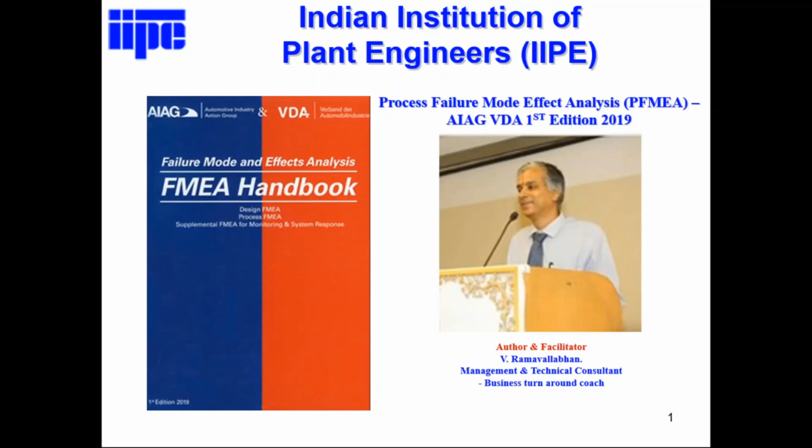This program has been organized by Indian Institution of Plant Engineers, IIPE. This body was started in 1971 at Chennai with just 80 members. The main objective of this body is to improve the effectiveness, utilization and productivity with the quality of plant and machinery in manufacture, distribution, service and other industries. IIPE has grown to a healthy plant with around 17,000 members. Today it has around 26 chapters all over India.

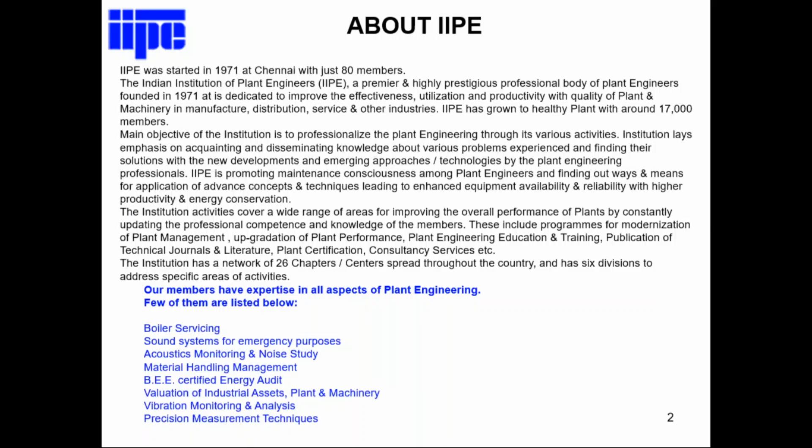So today the score stands at 19,846 members has been trained so far. Consulting projects, 119 has been completed and 6 is in process. The projects are like business turnaround projects, setting up the business objectives, laying out the roadmap for them to achieve, and various standards implementation, OEM requirements.

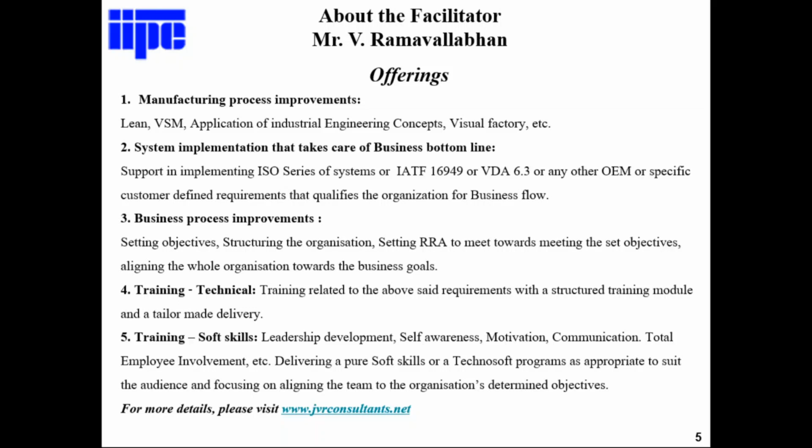On training, anything related to enhancing the technical competence of the people. And with regard to soft skills, empowering the people, making the people employable. Relevant appropriate training will be identified and determined, and those things will be offered. So this would be the offering.

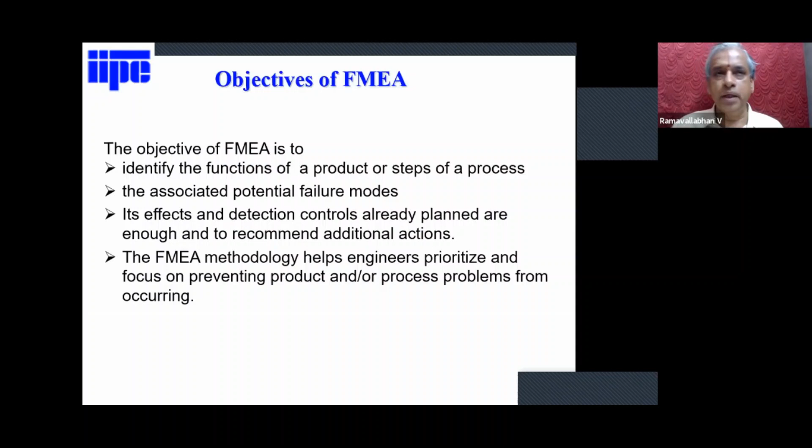Function is nothing but the solution for which you are working. Function is what? There are two things. People may get confused between the functional requirements and the requirements of the product. For example, if you have a pen, the pen's functional requirement is to write. Other requirements are the pen should be of diameter 10 mm, the length should be 15 centimeters or so - these are all requirements for manufacturing the pen. But basically what the pen's function is, is to write.

So you need to understand for what function this product is being made. So the objective of the FMEA is to identify the functions of the products or steps of your process, the associated potential failure, etc. Then if failure comes, what will be the detection mechanism, and how to prioritize which one to take first.

Then there is a foundation FMEA - people will have some family of products, and you can have some foundation FMEA for that. Overall, some FMEA you can do based on the model with minor differences. You can fine tune your FMEA part number wise. That is the thing told here.

Then, what are all the cases you will be using this FMEA? Case one is new design, new technology, or new process. Whenever you are going to do some new design, new technology, new process, you have to apply FMEA.

New application of the existing design - in the existing design or process, if you want to apply a new application, that time you have to do FMEA. And engineering changes - already there is a design, there is a process, on which you want to do some engineering changes. Whenever you do some changes, it may influence some other defect. Sometimes you go for fever, the doctor will give you ulcer.

Whenever you take some pill for fever, the doctor may give an antibiotic. Antibiotic is acidic based, but if you don't take antacid along with that, you will get ulcer. So you are doing some change in your product.

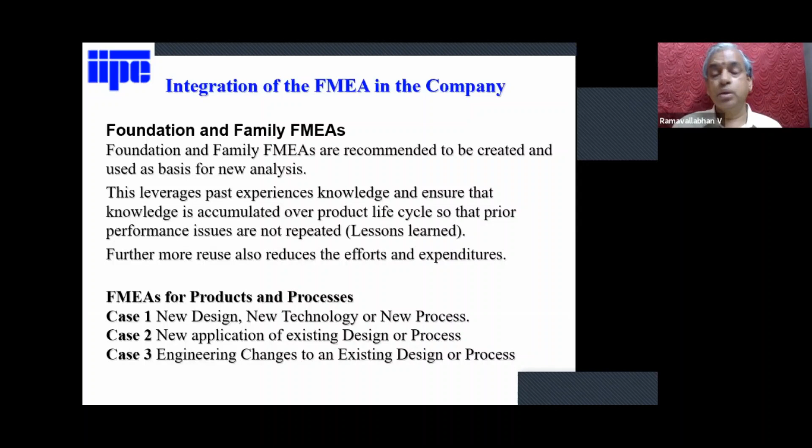Whenever there is a change, there is a possibility of influencing some other defect also. So that also you have to consider. Whenever that happens, you have to do FMEA, and when doing FMEA, you start with project planning.

Project planning involves the 5 T's. The 5 T's are intent, timing, team, task, and tools. Intent is the first T. Intent means objective, Lakshya, Kurikol - intent is the objective.

Timing, you know that. Team - who are all the team members that will be better for carrying out this particular project? For each team member, what are all the tasks to be given? There may be a tooling person who needs to be given some task related to tool development.

And there may be a quality person. He needs to read the drawing and tell them what is really important here. If there are any concern areas, he needs to come out with that. Likewise, each and every process member should participate - production, quality, maintenance. You have to bring the team member, and each team member should have the task.

Then tools - what kind of analysis tool you will be using. There is something called why-why analysis, 8D analysis, and fault tree analysis - what kind of tools you will be using for analyzing a defect or a failure.

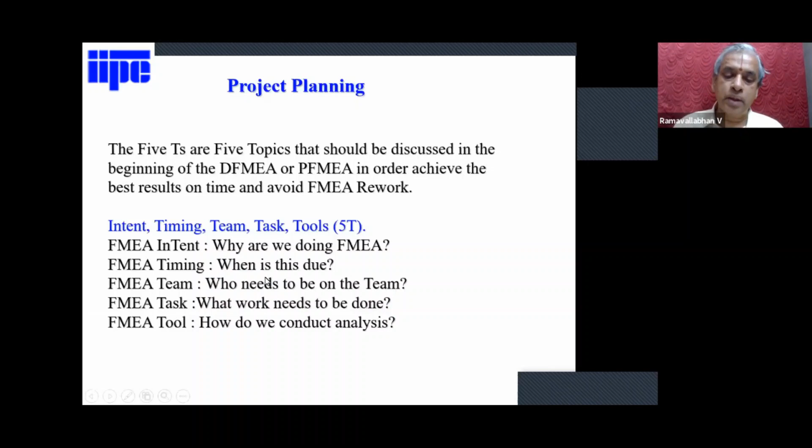So this is where intent is why we are doing this, timing is when it is due, team is who needs to be involved, task is what work needs to be done by them, and tools is how do we conduct the analysis. This is what it is.

The 7-step approach goes like this. In one shot, I will give you a clean explanation of this. You will get the background, and based on the background, if I proceed further, you may be able to understand better.

First step is whenever you start a project, you have to plan what for this project is being done. As I told you, you are going to design a product. Now we are going to focus on process only, but I will tell you how this process is getting birth from the design. Once you understand this, automatically the process of FMEA will be very, very simple.

First of all, what is this product? What are we going to expect out of this product? For that, you need to plan with the product name, which customer you are going to work for, what the customer is expecting out of it, the part number, etc. That has to be planned here.

Then comes the structure analysis. Structure means what? There is a building structure. In the building, you have kitchen, hall, bedroom, puja room, and so on. This is the structure of one building.

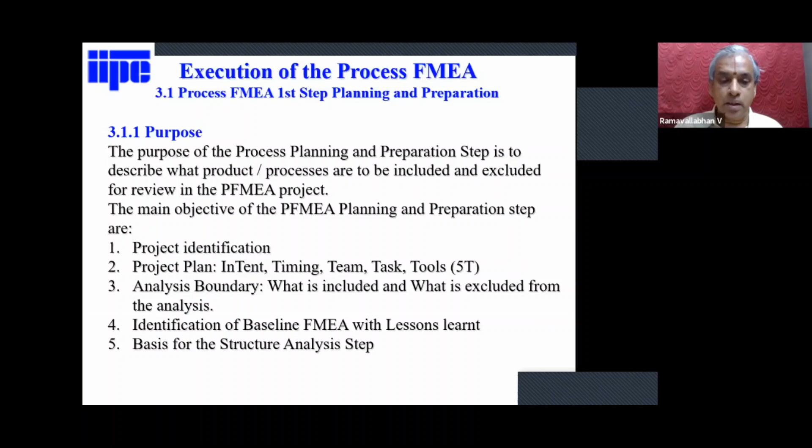Whatever is coming out of the line, which you are going to sell, that is called process item. It is the output of the multiple steps. It is called process item.

And each process step it traveled - like it enters a cutting section, milling section, machining section, then assembly section - each process step, whatever I named, that is called process step or process element. Each process step has a minimum of 4 M's to operate.

Each process step will have material, machine, method, and man. Machine is there, method is there, material is there, man is there. That's a minimum of 4; you can add others like environment or measurement itself. All these 4M's are called process work elements.

The output is process item. Each process step is called a process element, and each process element is being made by process work elements.

First of all, we need to understand the structure. The idea of understanding the structure is what are all the things responsible for making the product. So each step, when I go in detail, you will be able to understand. Now I am creating a background for this - you need not break your head much here. Just try to understand what I am trying to tell. Then when I go to each step, explaining each step, you will be able to understand.

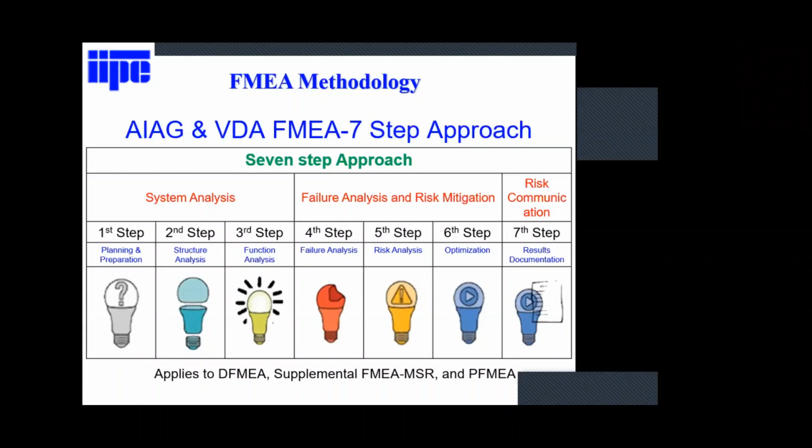Then, if at all a failure happens, what is the risk? A failure has happened, what is the risk? That severity we have to address, and the occurrence level we have to address. Then in the optimization case, for all the risk, you will have an action plan, how you will address this risk to minimize it. That is the optimization. Optimization is a word neatly coined.

We cannot avoid the risk totally. We can have a mitigation plan for that. So that is the reason optimization is a via media term. It is not totally avoided, nor is it totally not taken action on. It is a via media, it is in between.

How you will optimize - now we have to start learning to work along with this corona. Corona will be coexisting with us, so how will you work along with it? What will be your optimization plan? You cannot totally sit idle. So whenever you need to go out, wear the face mask, have social distance, and don't unnecessarily touch anything. Likewise, you have to take some optimization plan and then work.

Then at last, in the result documentation area, we will say: once this project is over, what are all the risks you have encountered, and for all those risks, what have you done as a mitigation plan.